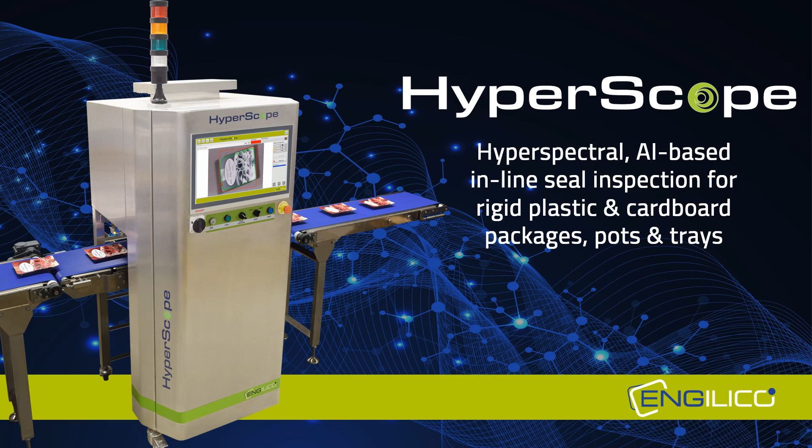Last year, we introduced in a previous session Engilico's HyperScope solution for seal inspection of rigid packaging. Today, we will present the latest features of our HyperScope solution, and we will start with a short introduction of the system, followed by a number of use cases.

In a nutshell, Engilico is a Belgium-based technology company founded in 2011. We have an enthusiastic team of 20 plus people with offices in Belgium, Germany and the USA. We are experts in inline seal inspection and help our customers to obtain better packaging quality, reduced packaging cost and increased packaging productivity.

Our solution for flexible packages, called SealScope, is designed for 100% inline seal inspection and monitoring of flexible packages, such as pouches, pillow bags, and flow bags. Currently, we have over 220 installations worldwide, mainly in food and pet care industry. Our newest solution and topic of this presentation is HyperScope for seal inspection on rigid plastic containers such as trays, pots, and other thermo-formed packages.

The incentive to develop a seal inspection solution for rigid containers came actually from our own customer base. Next to flexible packaging, a lot of our customers also produce in trays, pots, and thermoform packs, and they experience similar sealing challenges as with their flexible packages. Additionally, the use of rigid containers is very widespread, and in certain countries it is even more used than flexible packaging.

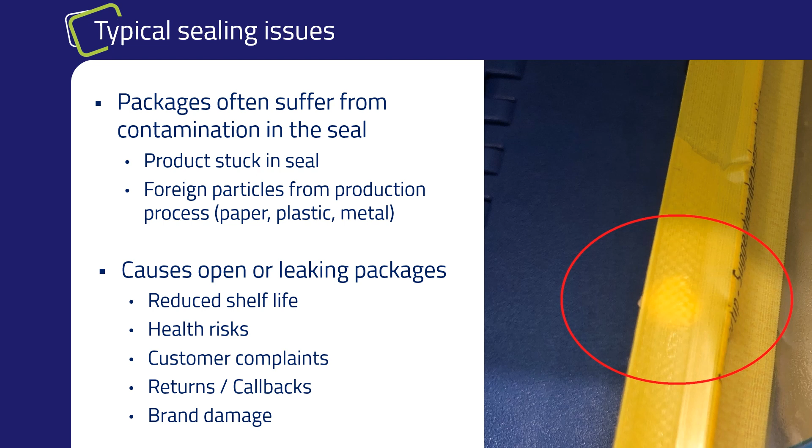So inline seal inspection is very important, but this has its challenges. As today many food producers use printed films for attractive looking packaging, this makes it harder to see if there's any contamination in the sealing area. Also, in the case of transparent films, there may be too little contrast between the contamination and the film. For example, in case of water or fat.

And the high production speeds don't make it any easier. A consequence of high production speed is that packages are not always nicely aligned on the conveyor, which makes it difficult for vision systems to recognize the exact boundaries. These challenges are hard to tackle with standard QC methods like manual inspection or industrial vision cameras.

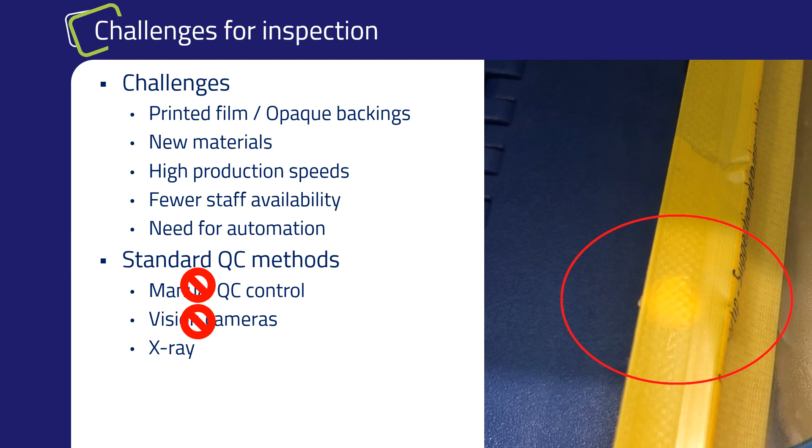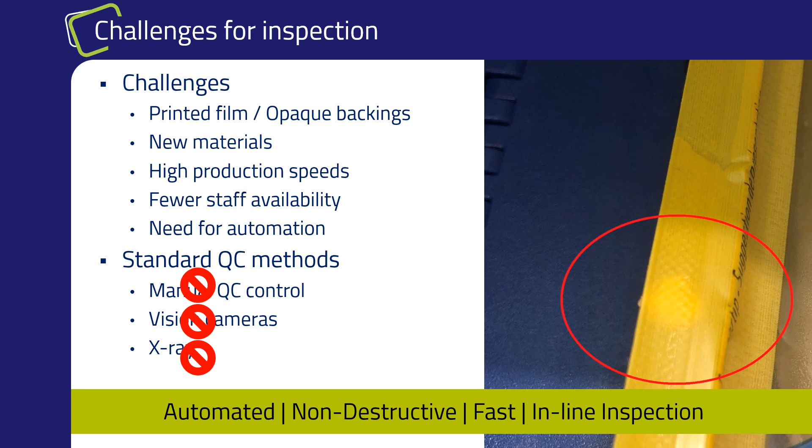And when considering X-ray for seal inspection, there is not often enough difference in density between the contaminant and the packaging material. So there is a clear need for automated, non-destructive, fast and inline inspection solutions for applications with printed film or applications with low contrast inclusions.

Hyperspectral cameras can tackle these challenges. Unlike standard vision cameras that only capture information from the visible spectrum, hyperspectral cameras record images in a much larger bandwidth, in the visible and near infrared domain. Each material absorbs and reflects a certain amount of light in function of the chemical composition and wavelength. Hyperspectral cameras measure the reflected light and make a spectral profile for each measured pixel.

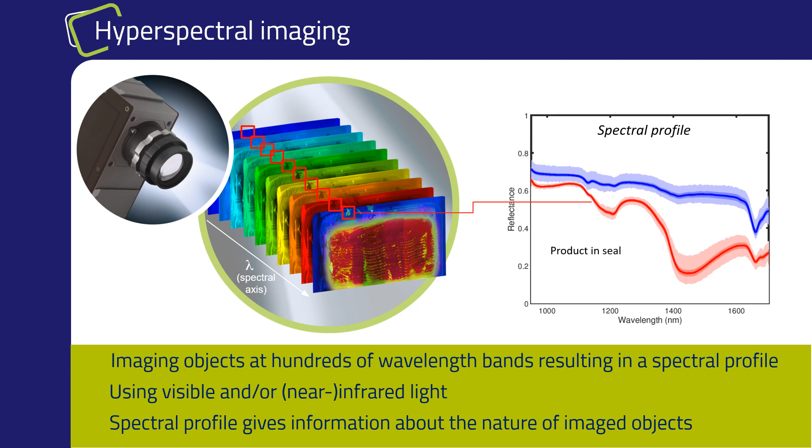The longer wavelengths penetrate plastic films, and so if there is a contamination in the sealing area, it will absorb more light than in case of a perfect seal, where no contamination is present. This makes it possible to distinguish inclusions when using printed film and in low contrast situations. This spectral profile, for example, allows to clearly identify fat and water in the seal.

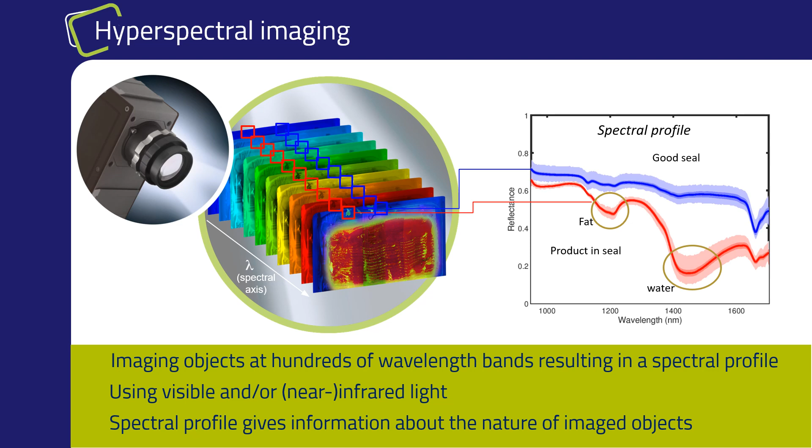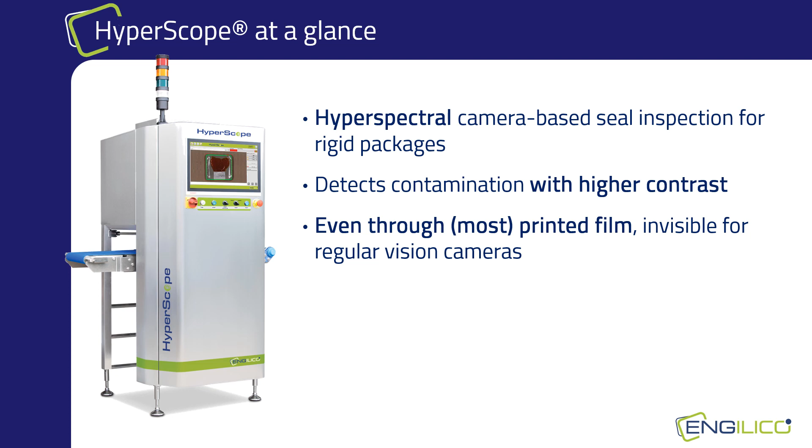The solution we present is HyperScope, a hyperspectral camera-based system for seal inspection of rigid packages. The main advantage of hyperspectral imaging is that it can differentiate materials with a much higher contrast compared to standard vision cameras, and that it can also see through most printed films, what standard cameras can't do, thanks to the longer wavelengths of the near-infrared spectrum.

HyperScope is an inline system that is able to inspect up to 160 packs per minute. For detailed seal area detection, it uses AI-based algorithms. And with an integrated conveyor and optional rejector, it can be easily retrofitted on your line.

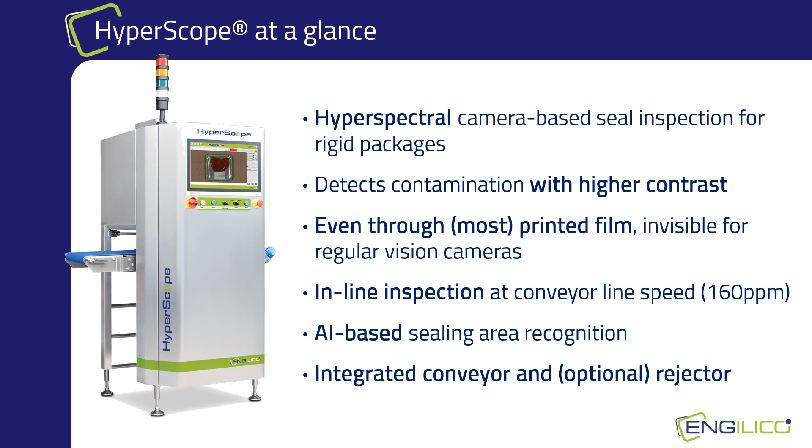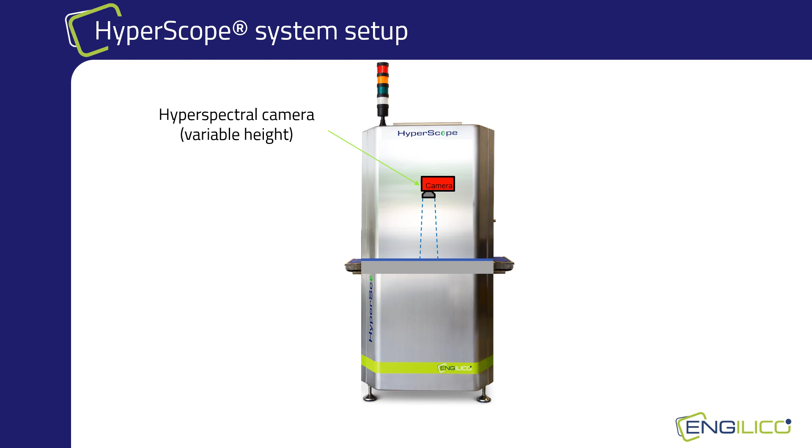So let's see how the system is built up. The system consists of the hyperspectral camera, dedicated lighting, a multifunction operation panel, and a GPU accelerated controller with analysis software. The system is of course made of stainless steel and washdown proof in order to operate in food production environments.

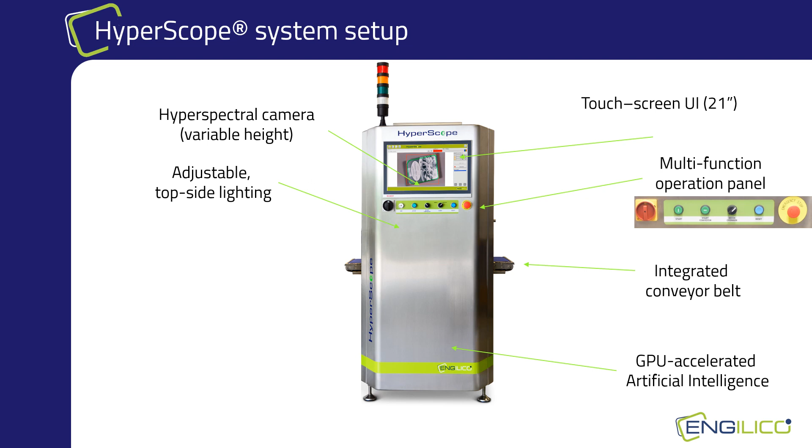It is delivered with its own conveyor belt that can be configured to the customer's needs. If a package with a contamination is detected, it can be rejected by the optional rejection unit. We will now see a demonstration video of HyperScope in action.

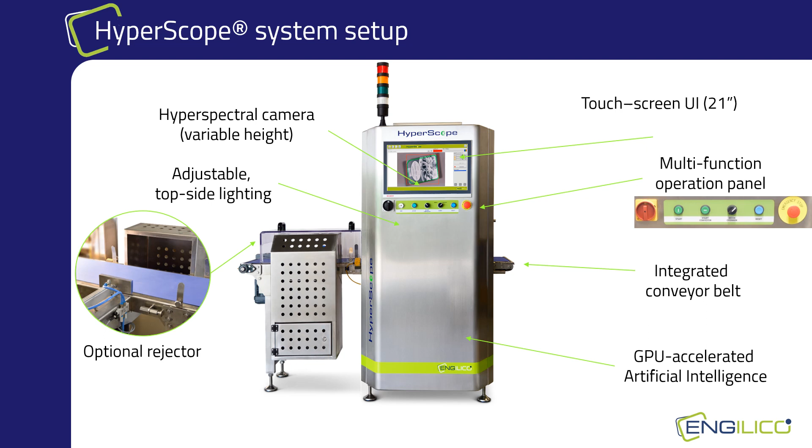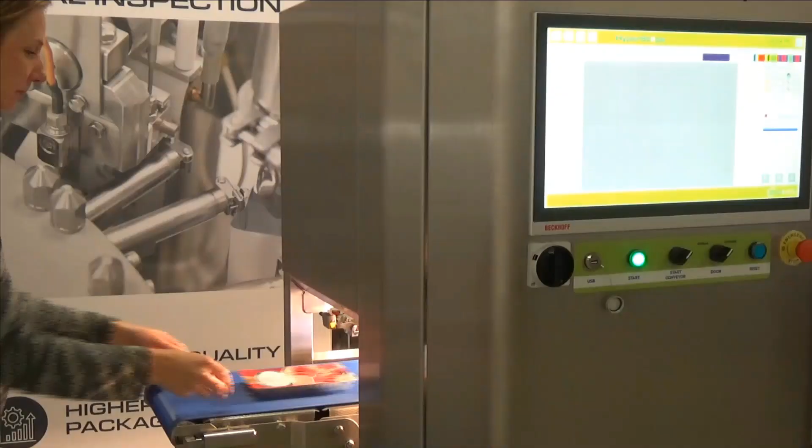This demonstration of HyperScope shows an example of seal inspection on trays with chicken salami. Some of the packages have a contamination such as a small part of meat in the seal. Because the film is non-transparent, the contamination is not visible to the human eye or to a vision camera.

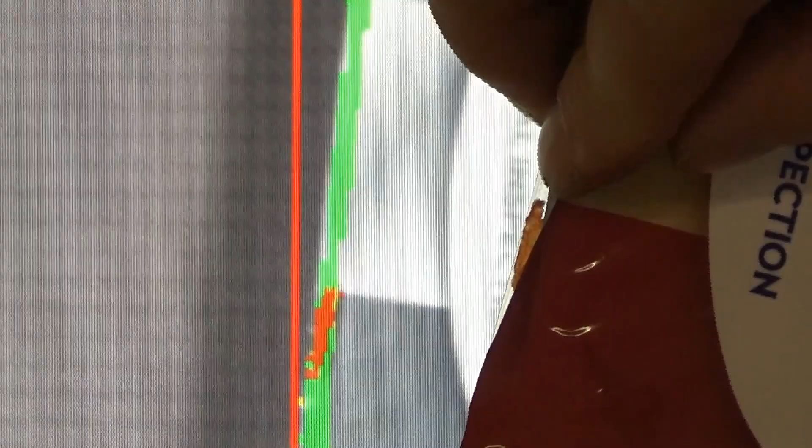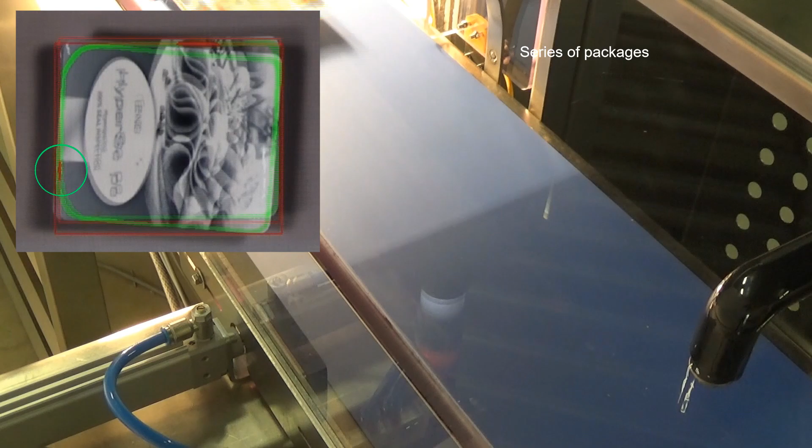HyperScope software automatically identifies the sealing area, which is displayed in green. Contaminations are shown in a different color. When a defective package is detected, a signal is sent to a rejection unit that removes the bad packages from the line.

The seal inspection is a combination of camera technology and intelligent image processing. The first step of the image processing is to recognize the position of the package on the conveyor belt, as the orientation of the trays can slightly differ. Here, artificial intelligence is used to recognize the orientation of the package.

Secondly, as we only want to inspect the seal, this area is determined by AI for analysis on contamination. Thirdly, we make a classification per pixel if it contains contamination or not. And finally, we need to decide whether or not to reject the package.

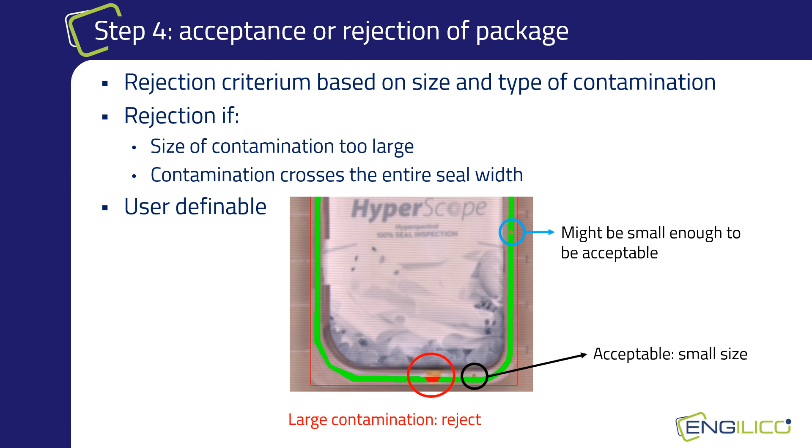Typically, you want to reject a package when the contamination exceeds a certain size or when it crosses the width of the seal. In the picture, we see three different contaminations that need to be interpreted. The large contamination on the bottom is considered too large and the pack is rejected. The other contaminations are too small. This criterion on rejection or acceptance of the package can be set by the customer.

We mentioned already the use of the AI algorithm, so we will explain why this is needed and beneficial. Packages are not always arriving at the inspection station in ideal conditions. They can have a slight rotation, or there might be different variations of packaging films. Also, trays can have multiple compartments, so it's important to detect all sealing areas. To correctly extract the sealing area, AI is used.

The benefit is that after an initial training, the algorithm is able to retrieve the sealing area faster and more precisely. Also, the algorithm will continuously learn to recognize more different situations. Here are some examples of how the AI algorithm precisely extracts the sealing areas. In examples 2 and 3, the packages have different orientations, but the sealing area of the package is automatically identified.

We will now move on to real-life cases. Specific elements of all these cases are that the products are gassed, subject to degradation, have a challenging packaging, or where producers want to automate end-of-line and reduce manual inspection. In the movie, we already saw an example of salami packaged in a tray with printed foil. This example is a package of smoked ham.

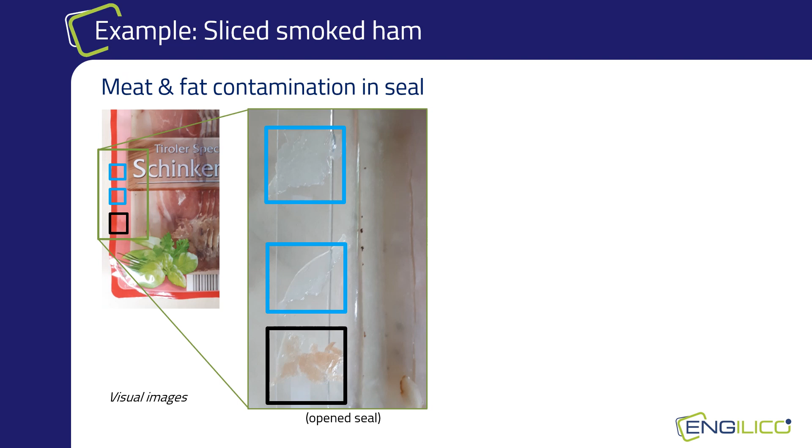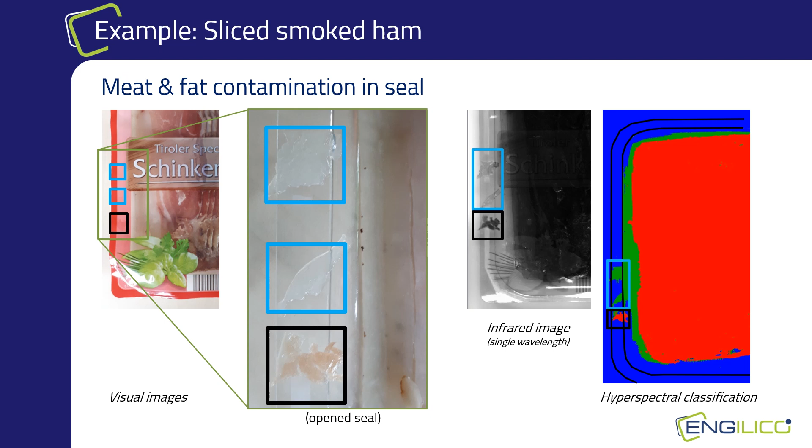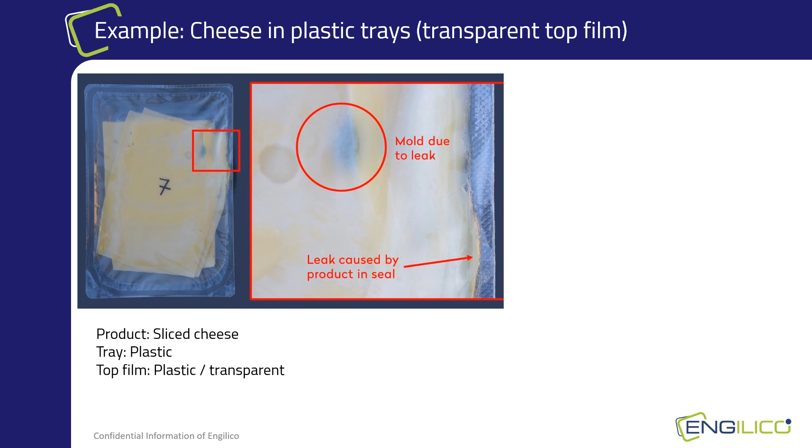The sealing area can contain both meat and fat, which is not visible under the printed foil. Also, the ham and fat have little contrast with the plastic tray. The hyperspectral camera allows you to distinguish both the meat and fat with much greater contrast as it has a different composition. A second example is sliced cheese in a transparent package. Here you can see the mold effect of a small leak that was also detected by the hyperspectral system.

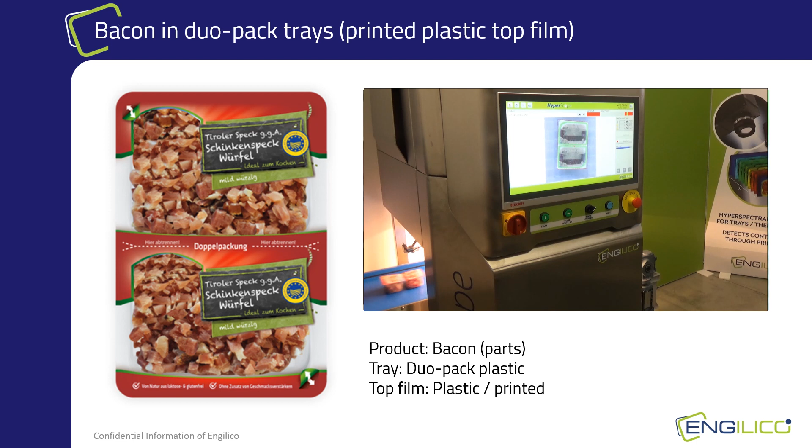A next example is a duo package with bacon. As the bacon parts are greasy and sticky, often there remains contamination in the sealing or in the bridge. For systems that use transmission lighting, it is a challenge as the canyon between the packages is narrow and subject to undesired shadow effects. With hyperspectral, the product is lighted from the top and the contamination is clearly identified.

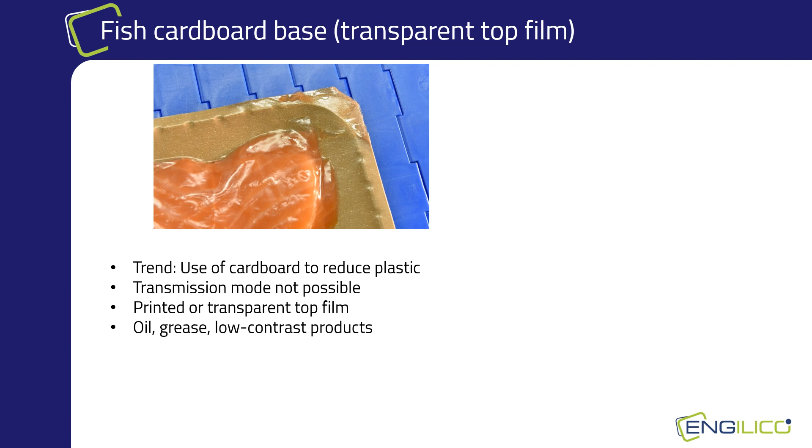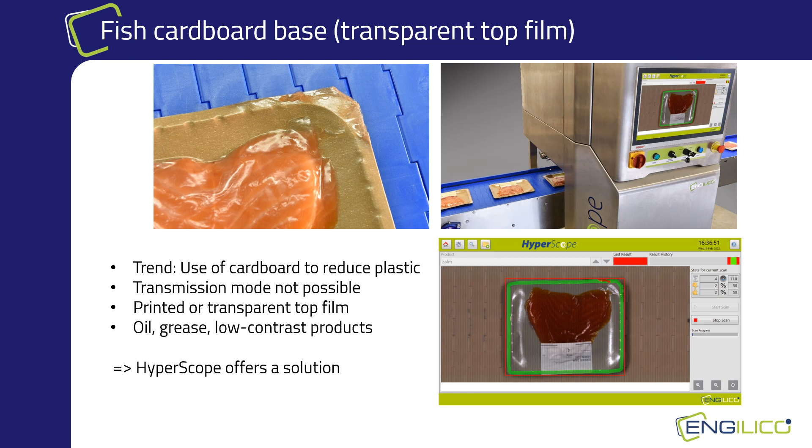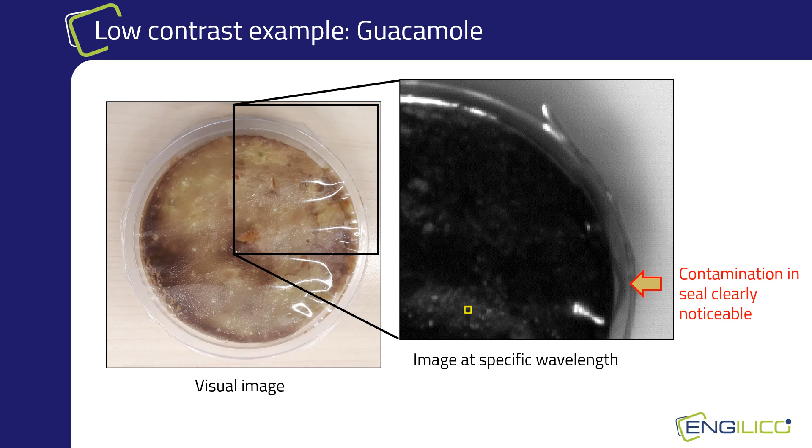Beside printed film applications, HyperScope can also visualize contaminations with low contrast. In this example of a guacamole container, there is no visible inclusion in the sealing area, but you can see that an air leak has spoiled the content. With HyperScope, the contamination that allowed air to enter the package becomes visible. A final example presents how hyperspectral imaging can also be used, next to seal inspection, to determine if opaque packages are filled or empty. So let's continue to the benefits of hyperspectral imaging.